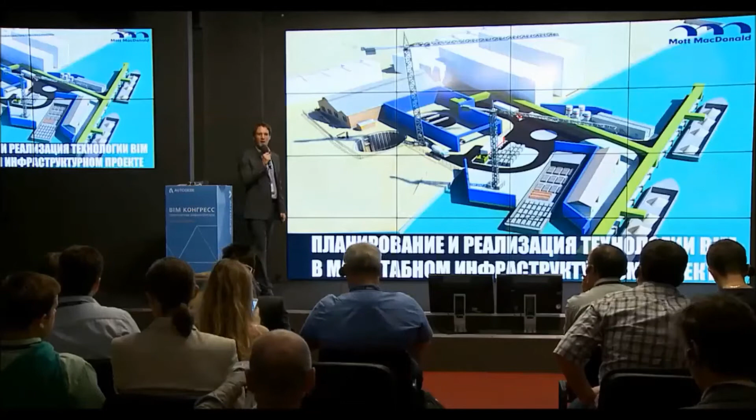My name is Michael Gaunt, and I am here to talk about the implementation of BIM on a large infrastructure project. Okay, so as I say, my name is Michael Gaunt. I'm a chartered engineer, and I work in London, England. I'm a tunnel engineer, and I focus in the power and water sectors.

So I'm coming to talk to you this afternoon about BIM from an engineer's perspective. So I'm interested in how we look at the models, how we use the models, how we check that the right information is in the models before we give it to the clients.

So just a bit on the company that I work for before we go any further. The company's called Mott MacDonald. We're a global management, engineering and development consultancy. We've got over 16,000 staff across the world. And one of the things that we're focusing on as a company is to bring BIM into all of our projects, because we believe in the efficiencies that it brings and the benefits that it can bring to both us as designers, our clients, and whoever's going to actually use the designs that we create.

So what I'm going to talk about today, I'm going to start to talk about an introduction to the project that we're working on. Then I'm going to talk about planning and implementation of BIM, something that we might not have done 2 years ago, but what we see is really key now and what we do on all our future projects. I'm also going to talk about some of the challenges of BIM, and then finally talk to you about the benefits that using BIM on our project has brought.

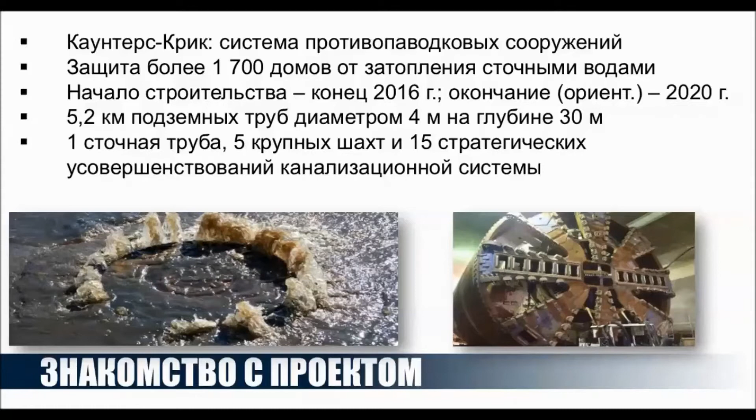It's got one main large tunnel drive site, which then will intercept a number of smaller shaft sites through the London area, and then we've got another 15 sewer upgrade schemes. So that's really key in terms of BIM implementation on the project, because we've got this one large project, and we've also got lots of little projects. So the processes we develop and use have to be scalable, work both on the large project and also on all the small projects.

So using BIM and the visualization element of BIM is absolutely key, because this is a very dense urban environment. There's no obvious places to construct a tunnel. We have to use our innovation. And by using these models, we're able to show our stakeholders, show the community, show the people who might be affected by this construction exactly why we're doing it and why we need to be in their areas. And hopefully by engaging them through the visualizations, they can gain a better understanding and we can work with them better.

So I'm sure you've heard in many of the presentations today that BIM is all about the life cycle of the project. At the moment we're at the end of stage 3, which is develop design. So we've got a concept, but we've not got too much detail into it. But we're aware that coming from stage 0 through to stage 3, planning is absolutely key on a BIM project. So what we're looking at now is we're looking through to construction and operation.

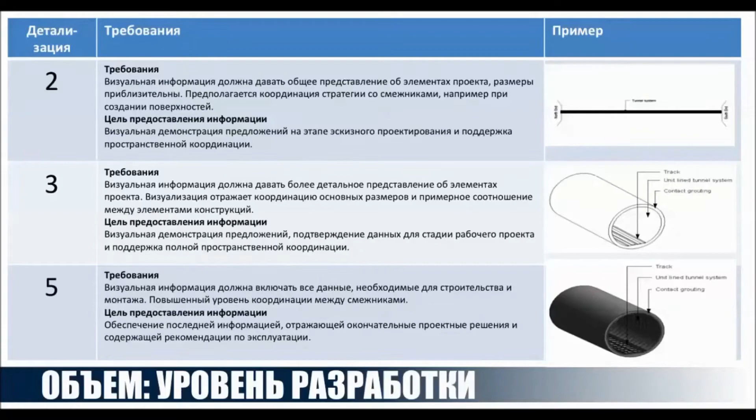When we move into stage 3, we're starting to add a bit of information to the model. We've got a 3D model at this stage because we're starting to get more confidence in exactly what the design is going to be. And then we move forward into stage 5, which is just for construction. We've got lots of information in, but we need to know what information we need to put into our models so then we can start working on it.

Next thing that we need to look at is the engineering technology assessment. So to produce that model, whatever it might be or whatever the specification is, what information are we going to get, and what do we need to produce for our client? What format does it need to be, and how are we going to get to that format? So we could use a variety of software, as you've seen today from Autodesk, but what is the most appropriate to be able to produce our information out? And that's a key part of the planning process.

But we need to understand what that structure is, and that will probably be based on the contractual mechanisms. But once we've understood that, we can then define that in our common data environment. So then we need to map the software we're using into the common data environment. So we've got work in progress, our shared areas, and our published areas.

I'm going to look at what software we're going to use. How are we going to get from our work in progress area to something that the client can look at? It's no good just saying, oh, we're going to use a Revit model the whole way through, because the engineers need to be able to check the model. What are they going to use for that? Well, maybe they'll use a Navisworks model. What do other disciplines want from us? Do they want a Revit model? Do they need something else out? It's something that we need to consider.

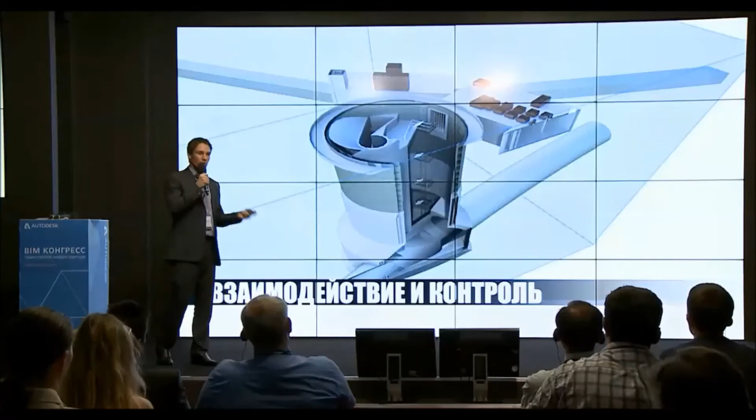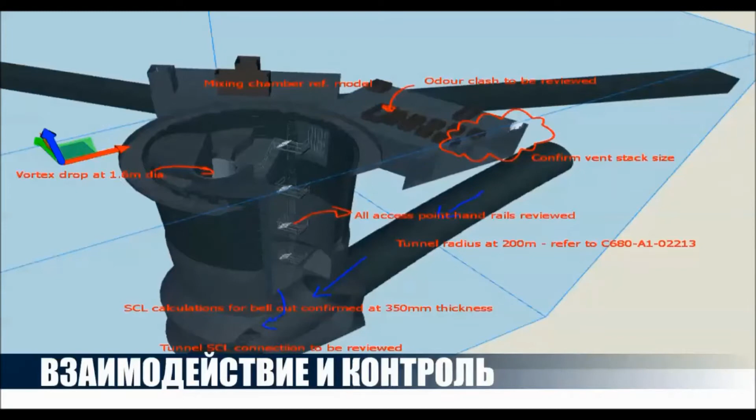So one of the things talked about from my point of view as an engineer is assurance. Great, we can produce some 3D models that look brilliant, but how do we check that the right information is there? What we've done is we've used Navisworks to mark up the design as we go along. But we need to build that into the process because to meet our company's insurance requirements, we need to store that markup somewhere to show that we have checked and applied a level of detail and a duty of care to that model. Again, it's all things that need to be considered.

So then going back to the common data environment, once we've done all of those previous elements, we now start to need to consider roles and responsibilities. And that's absolutely key for using a BIM project. Who is going to be responsible for checking the models? Who's going to be responsible for approving them before we push them through to the shared area? If we're working with drawings on the table, well, it's fine to be able to say, oh, well, he's free, I'll pass the drawing to him to check. But actually, in this situation, we need to build it into the software, so it needs to be black and white.

And what you're now starting to see is that BIM is actually your design management tool. It's your design management process. It's not something you can just bolt on at the end. It encompasses everything. So when someone comes to me and says, what's the cost of doing BIM on that project? Well, I actually need to step back and say, well, BIM covers every little aspect of the project, and you need to consider it.

Another thing which we found is often not considered at an early stage in the project is the hardware plan. Do we have the software, do we have the hardware, the computers to look at these models? Do our project directors have the laptops so when they're abroad they can check a model? Are we able to send information to all these offices over the internet? Is the internet link there? These are all things that we need to consider at an early stage before the project even starts.

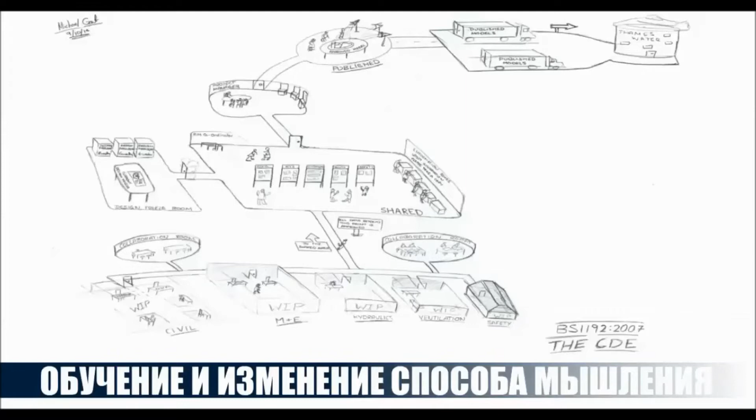Okay, now, so coming on to some of the challenges of implementing BIM, it's not just a case of taking the software package out of the box and implementing it. It's a real culture change. This slide is talking about training and BS 1192. BS 1192 is absolutely key, but everyone needs to understand it to understand how it works and why it is so important. So BS 1192 relies on the early sharing of information.

But what we've found is that traditionally, engineers will wait till the design they've got is right before they pass it to anyone else. What you're doing with BS 1192 is pushing information from the work in progress area through to the shared area, but putting on it a tag to say, well, I'm 20%, 30% confident on this information. I've pushed this information through for a specific reason. So I might push it through and know it's not perfect, but I need to push it through so that all of the other disciplines can start working. Now, we found that that's a real challenge, to educate people to understand why they need to do this, which improves the efficiency of the project, is one of the key challenges of implementing BIM.

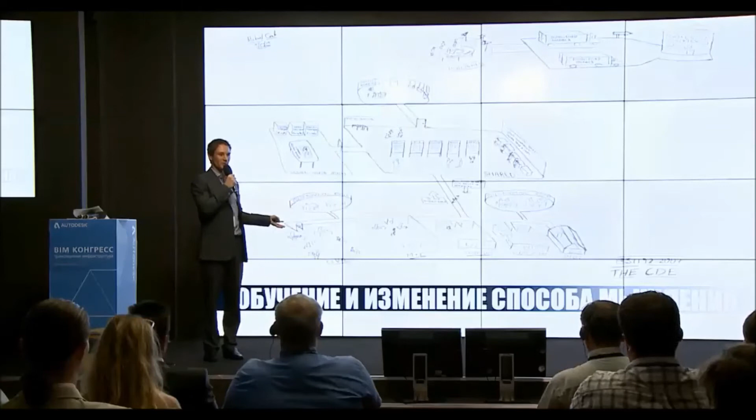One of the other challenges we've come across is the fact that engineers and the client as well do not get a physical handover of a drawing. They actually just get this digital model which is on the computer, so they don't necessarily feel like they own it. Again, training is required, education is required, and we know when you're working across huge teams of people and across many companies, that's a key aspect that you need to consider, because that training needs to happen at the start. One of the situations we've had is where we work on the project for a year and then we find out a number of colleagues aren't happy checking a model because they're just not comfortable using the software. So suddenly we've got a barrier to how we move forward. It definitely needs to be considered at the start.

So, this is just about leadership. It was mentioned earlier in the discussion at the start of the conference. So, implementing these processes relies on the people. Yes, software is part of it, but if the people aren't prepared to take it and run with it, it just doesn't work. You can't have 5 people being experts in it and the rest of the project not understanding it at all. So it relies on the common data environment, the people, and the trust. People have got to trust that if they push this information forward, it's used for the right reason, and they have to trust that everyone else on the project knows that. Leadership is key.

If you don't have leadership from the very top saying, look, you have to do this, people will revert back to their old ways. It doesn't matter how well you try to implement it, or the amount of documents and workflows you produce, you have to have that leadership to say, come on guys, you're coming with me, we're going to do this and we're going to do it right because we believe in the benefits it brings.

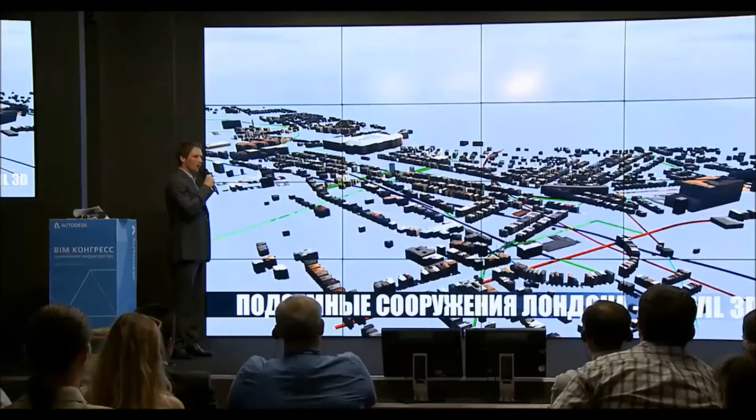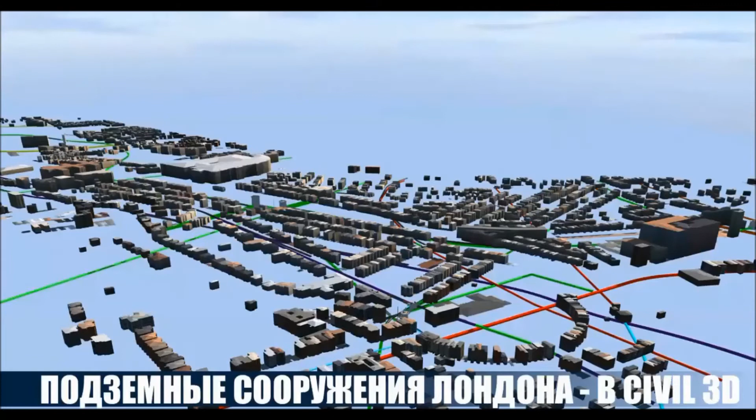Okay, so this is just looking at some of the outputs that we've produced on this project. We're a tunnel project, so we've used Civil 3D to model all of the underground utilities in London, so railway lines, sewer lines, power cable tunnels. Once we've done that, we can very easily see where we can knit our tunnel through all of these areas. We can see where the issues are, where we might have clashes, where we might be very close, and using this software has brought huge benefits because we can look at many options very, very quickly. There are lots of tunnels beneath London, so feeding it through is a very difficult job, and this software means that we can actually do that.

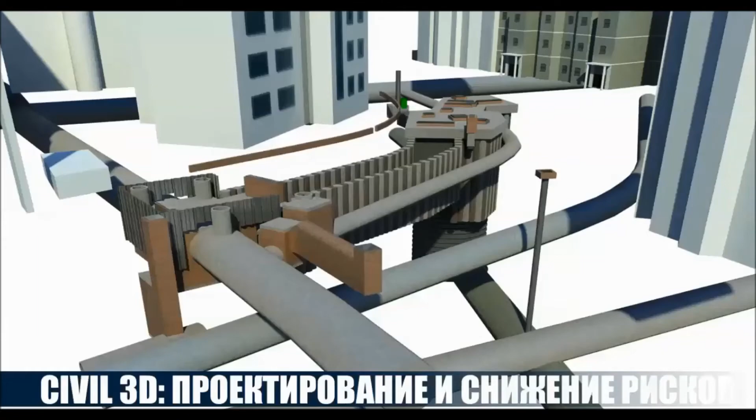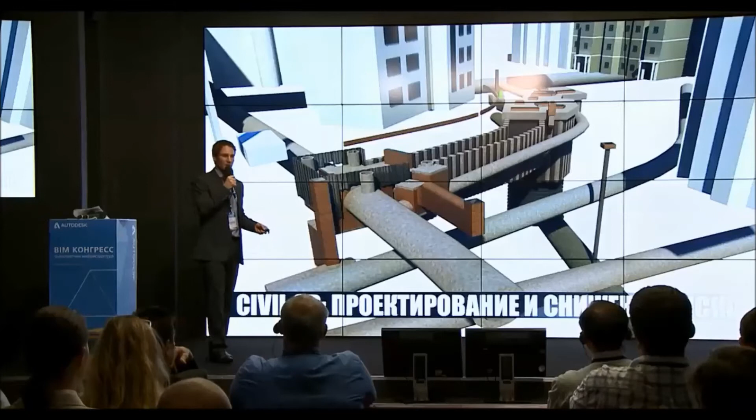So again, use of Civil 3D. We're in a dense urban area here, lots of houses around. By modelling everything in Civil 3D, straight away we can see where the issues are. We can see where the risks are, where we're very close to crossing tunnels. So we're identifying that risk very early on in the project. We can let our client know. We can improve the design. If we can't improve the design, then we can say, right, we've only got so much money for survey information. We can go out and target key areas and say, this is where the money is best spent. By identifying the risk at an early stage, it's okay to make errors, but let's make them in the digital environment before making them in the real world.

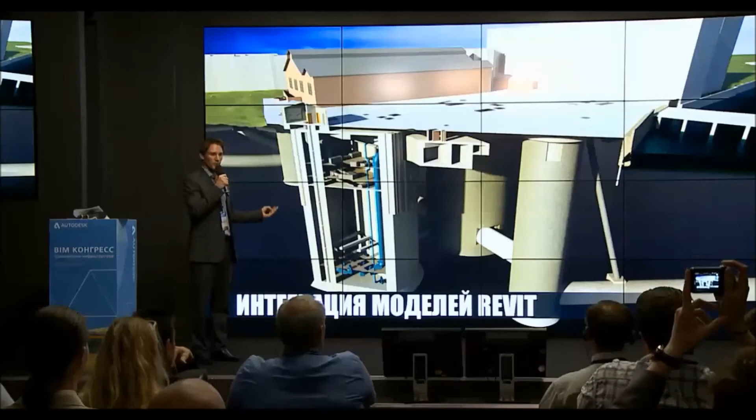So we've used Revit to model all of our connection shafts at the end of the tunnel and the points where the water goes down into the tunnel. This is the pumping station shaft on the edge of the River Thames. It's a very complicated structure, and we've got many disciplines working together in that area. So by applying BS 1192, bringing everyone together, we can produce a design where we know that everything's compliant. We've met the client's level of detail, because he said, we don't want lots of detail in the shaft walls. We just want the outline of the shaft, because at this stage, that's all that's needed.

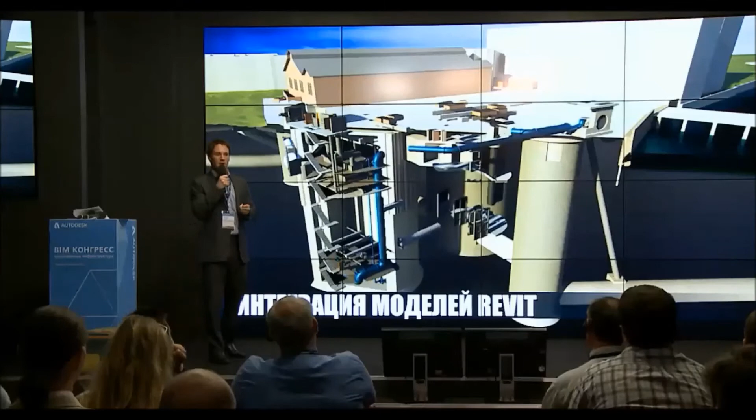Using Revit and this kind of software, because that's what we've picked through our engineering technology assessment, has brought many benefits. And a side product of that is that you can actually get in and see. The operations staff can come and look and say, well, actually, I'm not happy with that, I'd rather you change that. But we'd rather make that change now, at this early stage, rather than wait for it to be constructed and then realise that we've got an error.

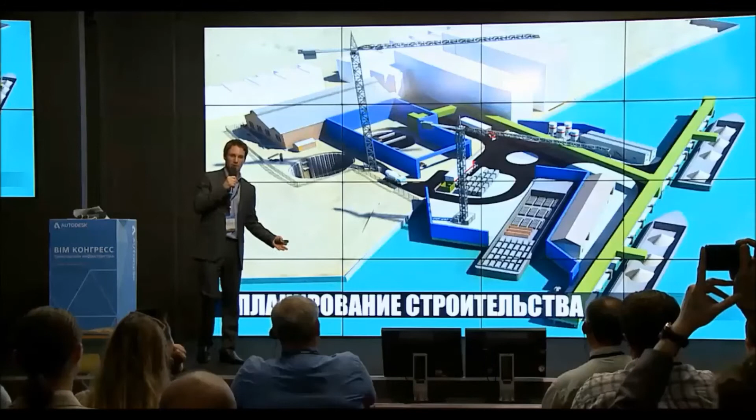So again, talking about the life cycle of the project, once we've completed these models, they're going to get passed over to the contractor to construct them. Getting the contractor on board early and looking at the construction layout, the temporary works layout, how is he going to get his ships near to the construction site? If we can identify this at an early stage, we reduce the likelihood of rework later on, reduce the risk in terms of planning, because people can see what's happening, and therefore we're saving costs, because change at this stage of the project is cheap, change later on in the project is very expensive.

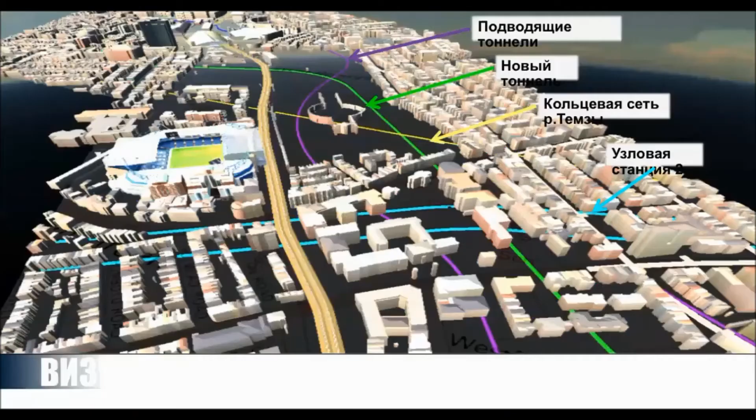And then we've used InfraWorks. So by bringing together all of the tunnels we've created in Civil 3D, the Revit structures that we've got, this is buildings from a GIS building layer, all at the right height. We can visualize the area.

We can show people what we're trying to do, and then we can talk about it, and we can make sure that we're all on the same page, because looking at a 2D drawing or just discussing, there might be areas where you can miss things. With these visualizations, everybody can very quickly understand what we're trying to do. Very useful tool.

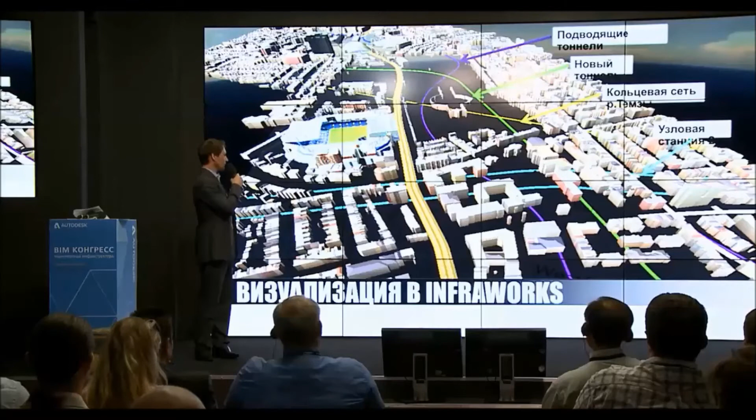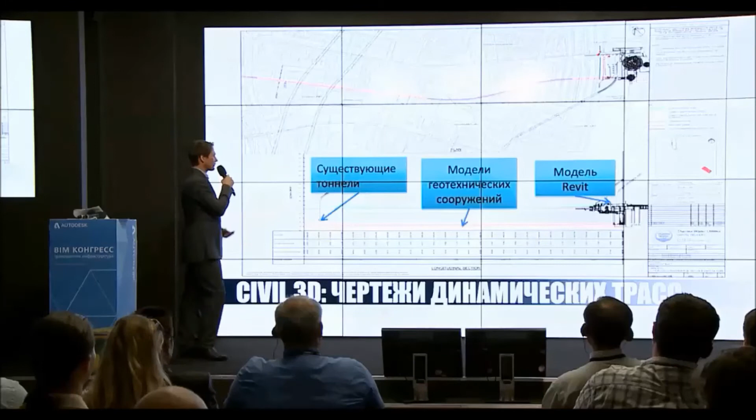And then going back to Civil 3D in terms of our outputs, so we're producing drawing outputs of where the tunnel's going to go. Once we have produced this and set up this template, the Revit files go straight onto the long section. We can see where the crossing tunnels are, which is all automatic. We can also see where the ground layers are, so when we're going through clay or sands or chalk, that's all highlighted on there.

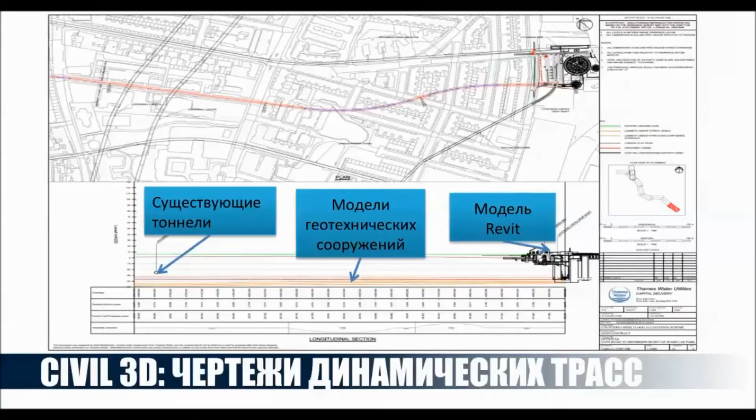And we can quickly understand the impact of a change, and then if we want to make the change, we make it in the model, the drawing updates very quickly, and then our output's done again, rather than starting again from scratch.

Okay, so again, just a bit more on visualization. From an engineer's perspective, the most important point of the design models for me are you can see it on the screen, you can pull the information off very quickly, develop the design very quickly, but the visualization element is also very important. So here we used the gaming engine, and we took our models, put them into the gaming engine,

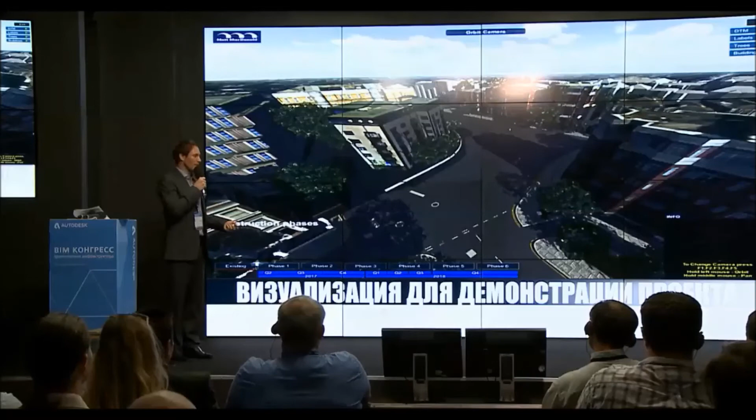and then the public can come along, they can basically play with the gaming engine, they can see the impact that construction is going to have on their area, and once they've understood better what the impact is going to be, they can talk to us, understand why we've done it, and hopefully we can then get them on board quicker, so we can hopefully get through the planning process easier.

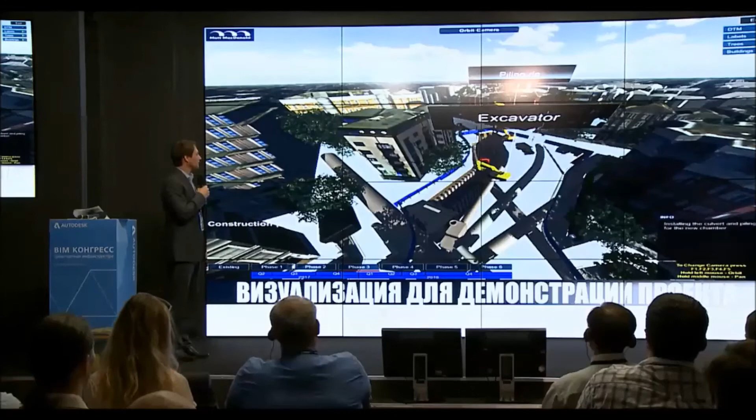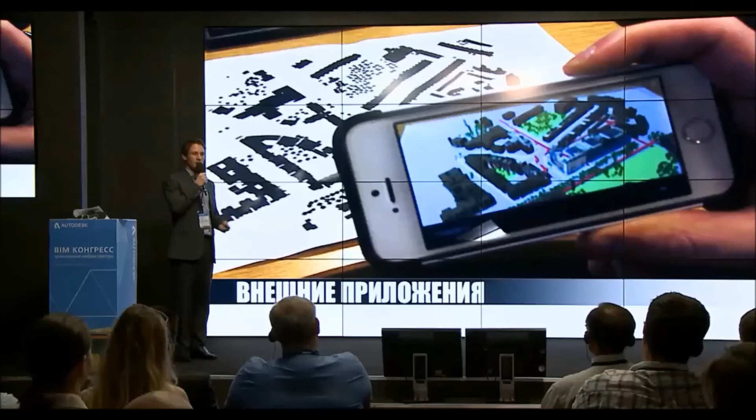Another example where we're trying to use our models quite innovatively, we're looking at augmented reality apps with a company in London. So we send them our design models, and then through the use of an iPad or an iPhone, the model appears on the iPhone, and then again, it can help people to actually engage with the model. So rather than come to a church in London and look at some drawings on a wall, you can actually use this and really get into the model and really understand it.

And at an early stage go, I'm not happy with that, please can you change that? And then when we get to the end, he can be confident that what we've produced is what he wants. And also we can be confident that what we've produced is what he wants. A very important part of it. And again, that's bringing the collaboration together, because more people are looking and working with the models.

But they've now seen the benefits, they've now gone through the training, understand how to use the software, and they're all actively on it. So it's not 3 people in a corner using this software, it's everyone on the project team actively using it. And again, the more people that get involved, the more efficiencies we can achieve, and the greater the benefits become.

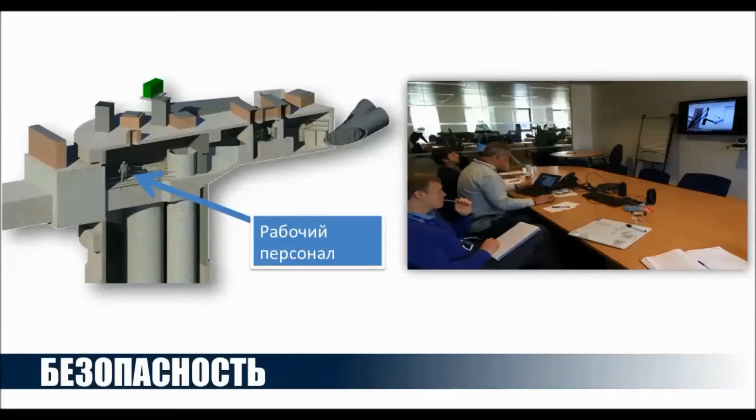On the left-hand side, I've just noted our little operations man inside the shaft. So again, at an early stage, we can look at it and say, right, these are the people who are going to be using this structure. How are they going to get in there? How are they going to maintain it?

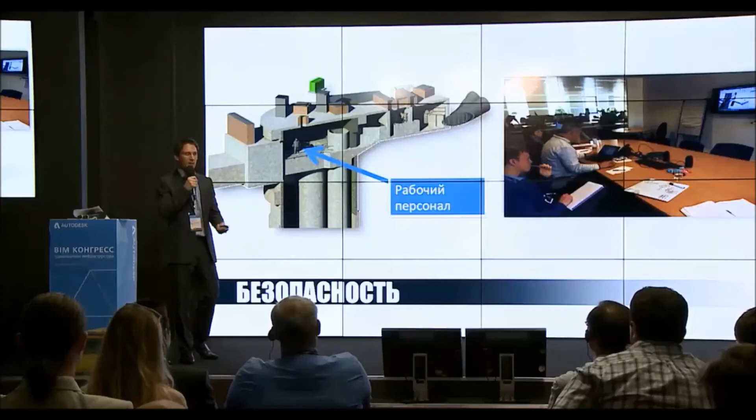We can show them models like this, so they can look at it and straight away they can say, not happy with that, please change that. We've looked into using the Oculus Rift goggles so they can really get into the model. And that's something that would never be possible with the old way of working.

So by using these processes, using this software, we can look at a vast amount of options and make sure that we're picking the very best option for this area, minimising the impact on the people there, maximising the output for the client.

So just to summarise then, on this project we believe that we've gained maximum benefit because we understand how important it is for planning.

I can't read Russian, so I can't tell you the next bit. Just wait one moment.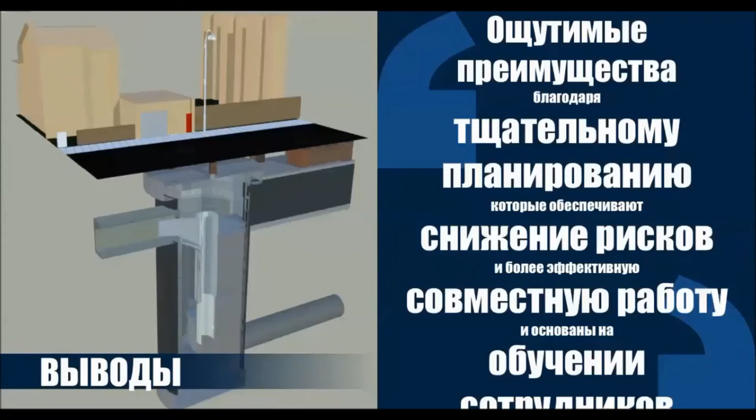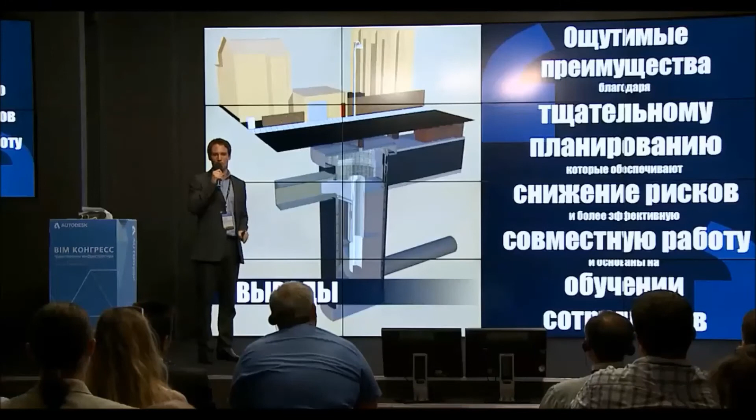Okay, so we've taken significant benefits because of careful planning, which has reduced the risks. It's improved collaboration on the project, but it ultimately relies on training and the people that are going to do it. I'm not standing here and saying that we've got the perfect BIM project. We're very, very far from that, probably. But actually, over the past 2 years that we've been working on this project, because we've been pushing hard, we now understand why these standards have been created in the UK, why the government is driving it.

We understand the impact of planning and the benefits that can bring, which means that ultimately our project is improving in efficiency. Hopefully we're reducing costs by looking at many design changes for the same costs previously. And we've engaged the rest of the life cycle, so that now when we've got the design model, we're confident that the contractor is going to be able to use it.

We're confident that the operations staff are going to get the information they want. And we're confident that the maintenance team will be able to get in there and use it. So ultimately we can be much more confident with what we've produced because of the tools that we've used.

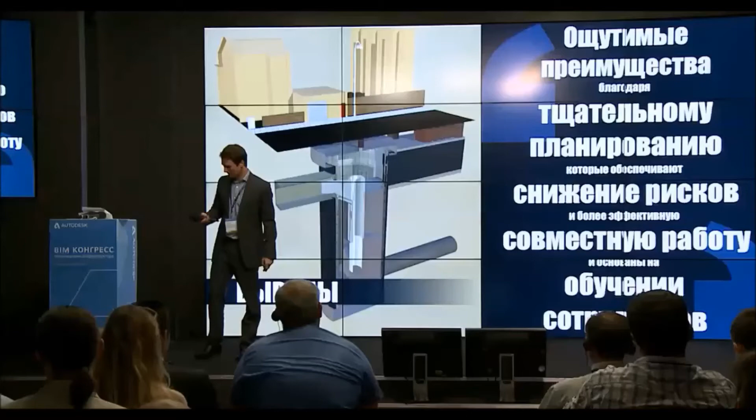Thank you very much. You don't have translation, yeah? Okay, I'll translate for you. Oh, okay. Sorry.

While you worked on this project, what was the technology of transferring information between parts of your project, between different specializations? Did you use some kind of internet services, or was it some local software? Or if you used both, what is the main one?

What was the main one? The common data environment was stored on ProjectWise, and that was because of our engineering technology assessment at the very start of the project. But in terms of bringing the models together and reviewing the models between disciplines, we used Navisworks. So all of the models came together in Navisworks, and we could then see how one discipline impacted on the other discipline. We marked it up on Navisworks, and then the modelers went away.

But yeah, the common data environment was on ProjectWise, which is internet-based, which moved the information between the departments, and that was because of the engineering technology assessment.